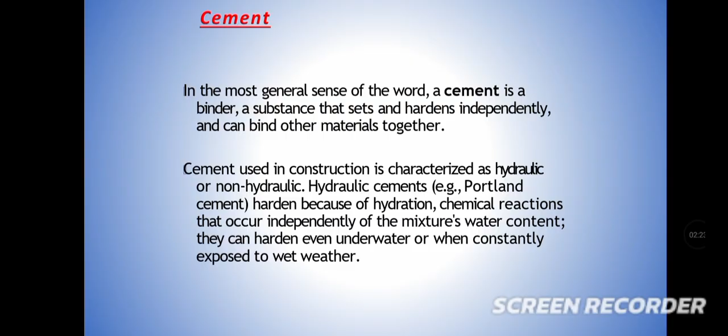Now, we need to know the history of cement. It's quite interesting, how cement was first processed. To have just a brief idea of the origin of cement is important, because without knowing this we will not be able to generate an idea on the current state of cement. So to know the present we need to know the past, as we all know that the present is the key to the past.

Now, John Smeaton made an important contribution to the development of cements. He planned the construction of the third Eddystone lighthouse in the English Channel. To construct that, he needed a hydraulic mortar that would set and develop some strength in the 12-hour period between successive high tides. So what is mortar? Mortar is nothing but a blended and binding substance.

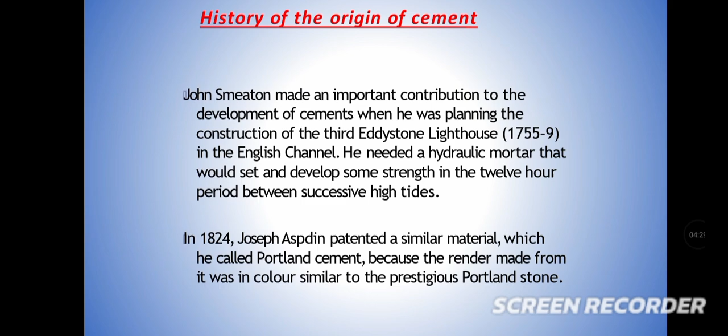Now in 1824, Joseph Aspdin patented a similar material which he called Portland cement, that is hydraulic cement, because the render made from it was in color similar to the prestigious Portland stone. So in 1824, Joseph Aspdin patented a similar material called Portland cement, and it has been named after the prestigious Portland stone.

Now the investigations of L.J. Vicat led him to prepare an artificial hydraulic lime by calcining an intimate mixture of limestone and clay. What is calcining? Calcining is nothing but reaction with calcite, that is calcium carbonate, which is the major component of limestone.

Okay. And further, in 1845, Isaac Charles Johnson burnt a mixture of clay and chalk till the clinkering stage to make better cement. Clinkering stage means when the cement forms a clinker. Clinker is nothing but a compound or several kinds of compounds which are formed after the hydration of cement.

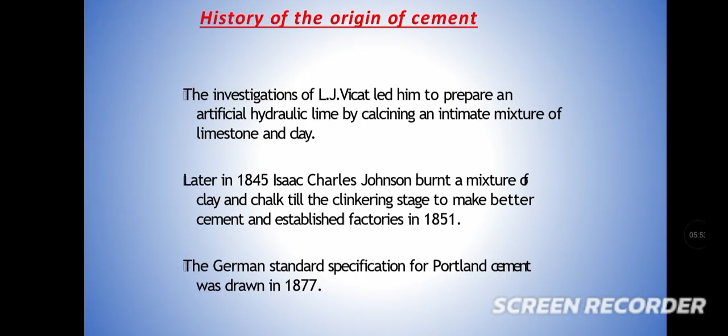And the German standard specification for Portland cement was drawn up in 1877. The British standard specification was first drawn up in 1904. The first ASTM specification was issued in 1904. In India, Portland cement was first manufactured in 1904 near Madras by the South India Industrial Limited.

But this venture failed. Between 1912 and 1913, the Indian Cement Co Limited was established at Porbandar, that is in Gujarat, and by 1914 this company was able to deliver about 1,000 tons of Portland cement.

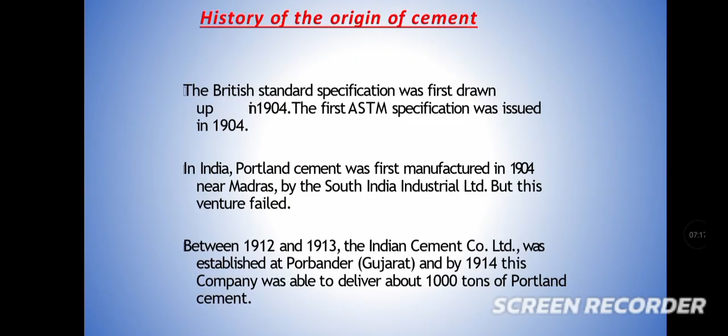In the previous class also I discussed that Portland cement is nothing but a hydraulic cement, because without hydration, without mixing of water, a cement cannot bind or adhere or provide strength, because the strength generates after the hydration process, and because of the hydration process several compounds form which then provide strength to the cement.

Now I will give you a brief description of the manufacture of Portland cement, and I will discuss it elaborately also when I discuss the hydration process of cement. I will discuss the manufacture of Portland cement in elaboration.

Now, cement is made by heating limestone, that is mainly made up of calcium carbonate, with small quantities of other materials such as clay, to near about 1450 degrees centigrade in a kiln, a burner or a kind of burning system container, in a process known as calcination, whereby a molecule of carbon dioxide is liberated from the calcium carbonate to form calcium oxide or quicklime, which is then blended with other materials that have been included in the mixture.

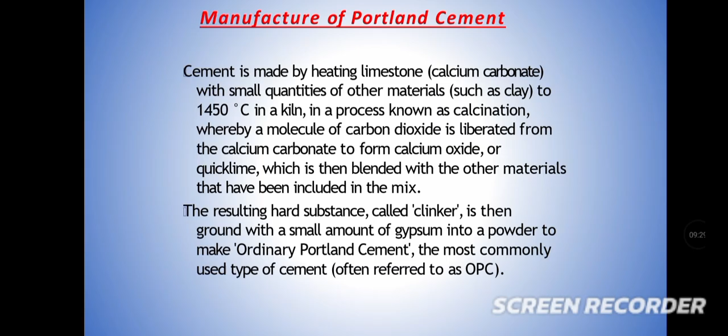Now there are several types of cements: ordinary Portland cement, rapid hardening Portland cement, low heat Portland cement, sulfate resistant cement, blast furnace slag cement, masonry cement, white and colored Portland cement, air entraining cement, Portland pozzolana cement, high alumina cement, oil well cement, quick setting cement, hydrophobic cement, expansive cement.

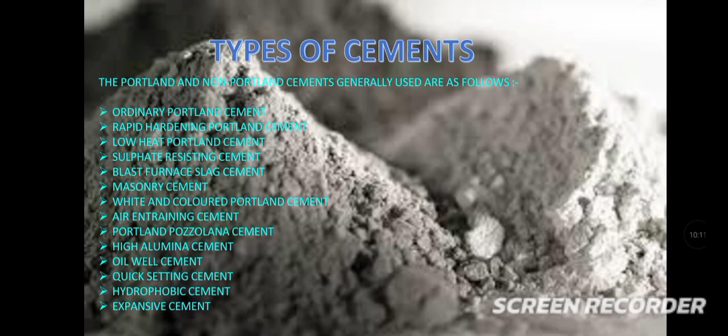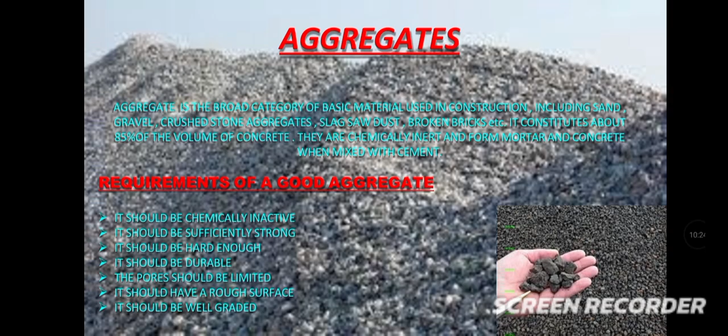Each cement has a different aspect for several kinds of construction, which will be discussed later on. Okay, now regarding cement, we have already received a brief idea regarding its process of manufacture, its origin and history, how cement forms, its major chemical composition, and what is its role and usage.

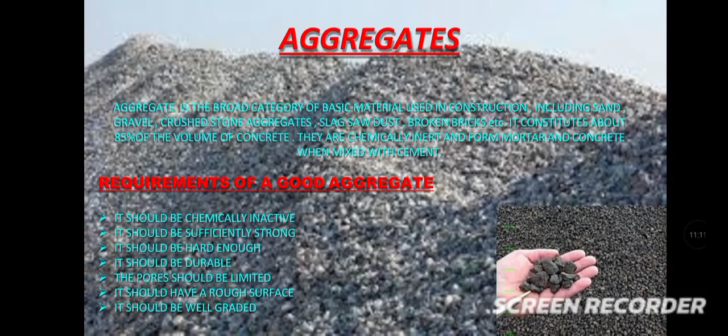So in the previous class I have already discussed that concrete is made up of cement, water and aggregates. Regarding cement, we have already developed a preliminary idea. Now we will develop a brief idea on aggregates. So what is an aggregate? Aggregate is the broad category of basic material used in construction, including sand, gravel, crushed stone, slag, broken bricks, etc. In the previous class I also told you that aggregates should generally be naturally occurring. A piece of stone is a kind of aggregate that can be of several origins.

It can be of igneous origin, metamorphic origin, or sedimentary origin, and crushed aggregates are also naturally occurring, but they are the disintegrated part of a broken rock which got weathered and eroded and formed crushed aggregates. And there are several shapes and sizes of aggregates. Size, I have told you, can be gravel size, cobble size, or pebble size. There can be several sizes of aggregates.

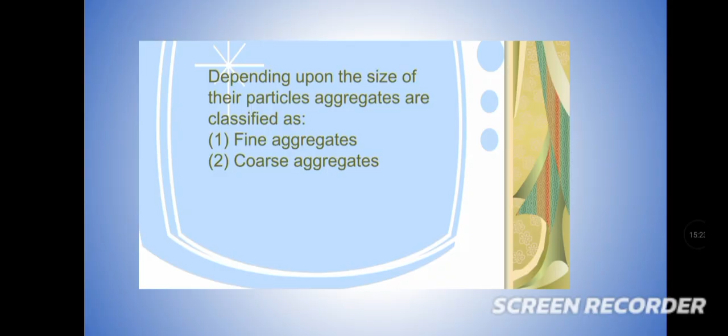Now, depending upon the size of their particles, aggregates can be classified as fine aggregates and coarse aggregates. A sieve is a tool which is generally used for sieving. Aggregates whose particles pass through the 4.75 mm IS sieve are termed as fine aggregates. Most commonly used fine aggregates are sand and crushed stone in powder form. However, sometimes surkhi and ash or cinder are also used.

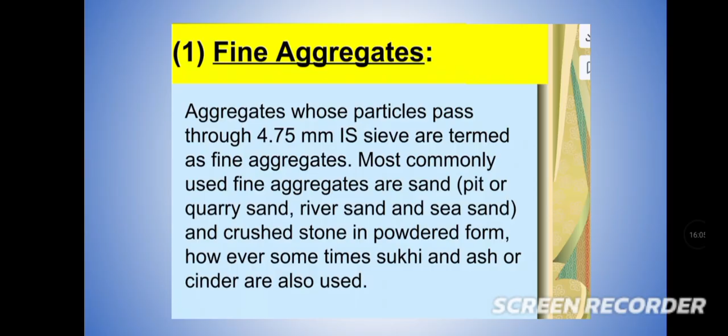Now, coming to the fine aggregates, I have already told that sand is a type of fine aggregate. It consists of small angular or rounded grains of silica, depending upon the source from which it is obtained. Generally, sand is the weathered and eroded product of any kind of rock. It can be of igneous origin, metamorphic origin, or sedimentary origin.

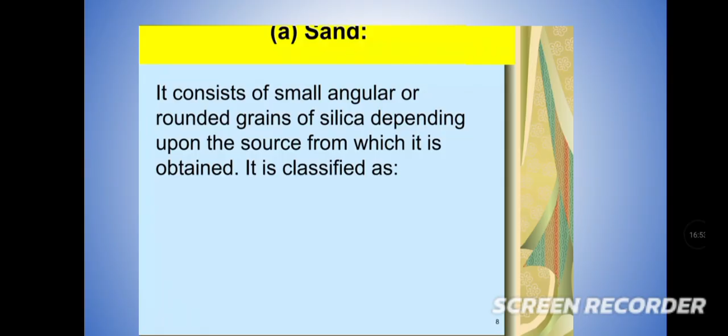Now, there are two types of sand. One is river sand. It is obtained from the banks and beds of rivers. It may be fine or coarse. Fine sand obtained from beds and banks of rivers is often found mixed with silt and clay, so it should be washed before use. But coarse sand is generally clean and excellent for use, especially for plastering.

Sea sand is another type of sand. It consists of fine rounded grains of brown color, and it is collected from seashores or sea beaches. Sea sand usually contains salts, and using it in mortar causes disintegration of the work in which it is used. In RCC work, these salts will attack reinforcement if salt content is high. These salts may cause efflorescence. It should be used locally after thorough washing.

So in RCC work, the sea sand should be washed because salt is present, and the salt will affect the reinforced concrete work because it will cause damage to the reinforcement. So before using sea sand, it should be washed.

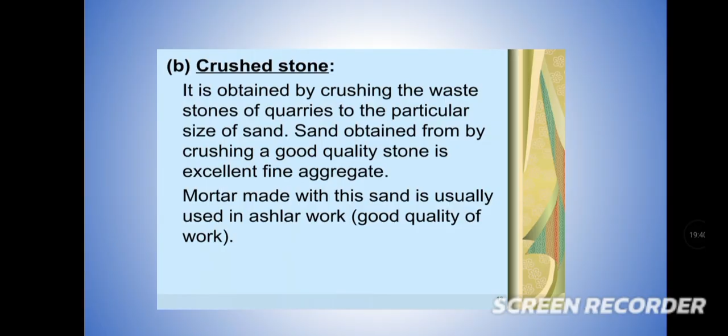So what I have now discussed is that good crushed stone is a kind of fine aggregate which is obtained by crushing the waste stones of quarries, and sand obtained from good quality rock, that is almost unweathered rock, can serve as a good quality fine aggregate. So these are the fine aggregates. We will be discussing coarse aggregates in the next lecture.